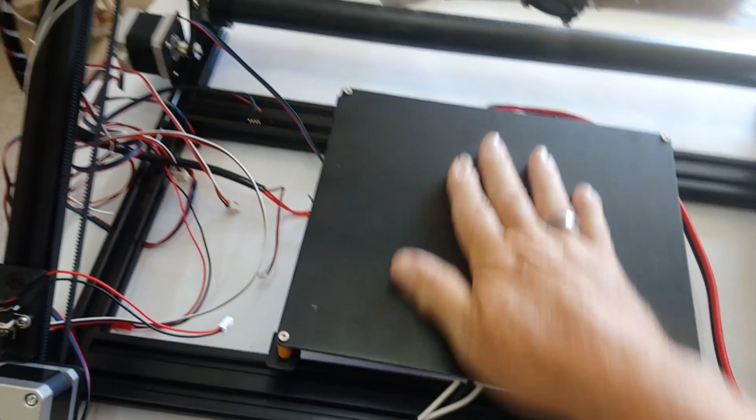I ordered it as an early bird. It took a long time to get here due to COVID and all sorts of other problems. Anyway, when I got it, I was really disappointed. The design is, I can't imagine anybody designing a printer like that. I'm sorry, no.

So this is the story of me trying to fix that. And I'm getting there. I'm not finished yet, but I'll show you what I've got so far.

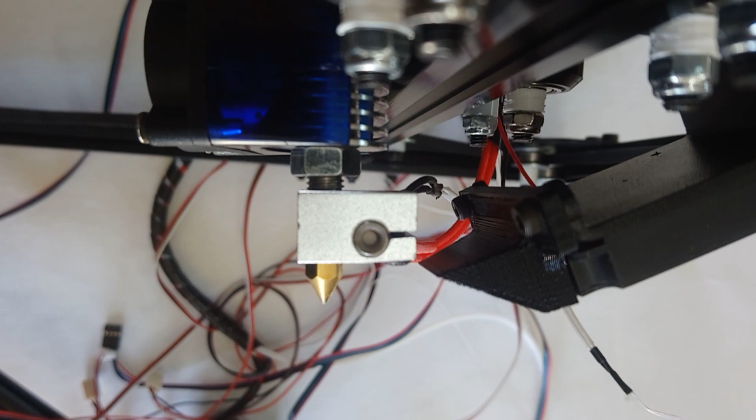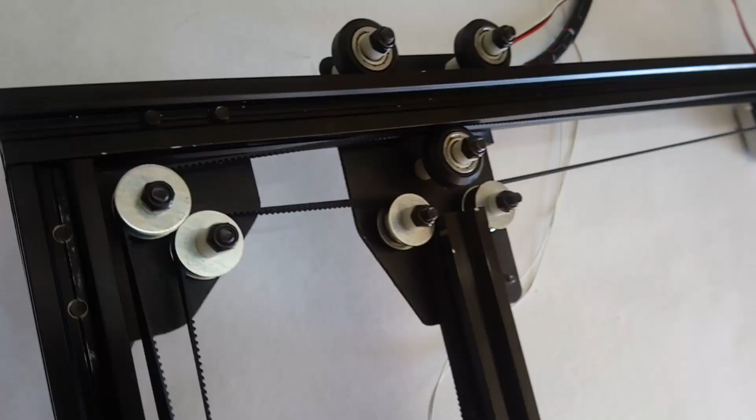There's supposed to be a belt across the heat bed here. Basically it's a CoreXY design, with the motion system using V-slot wheels in the ubiquitous V-slot, and these standard end stops and so forth.

But unfortunately I'm taking it apart again because the motion system, the CoreXY system, is completely flawed and badly designed. None of the belts are parallel. I don't know if you can see it here, and at the top you'll probably be able to see it better. None of the belts are parallel that need to be parallel.

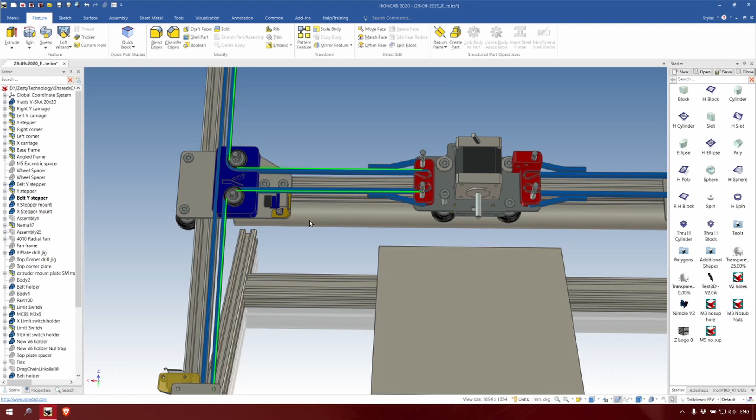There's no way to adjust the wheels, and there's no eccenter at all. And there's also no way of adjusting the tension of the belts.

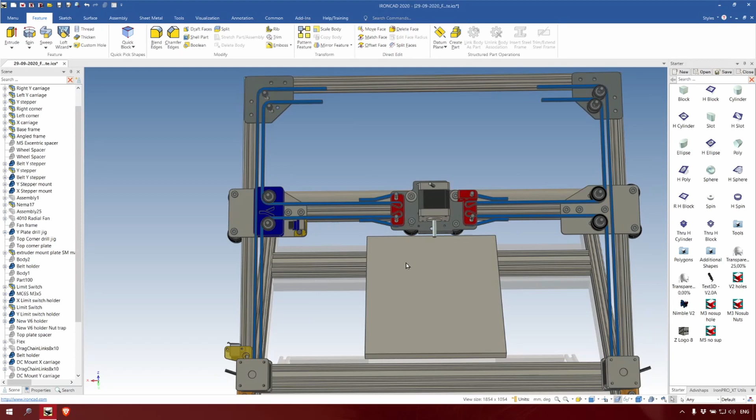So basically it's a V6, an E3D V6 clone with a Mark 8 nozzle, but of course the thread inside the nozzle isn't long enough, so the heat sink or heat break screws all the way into the heat block, meaning that little heat gap that there is, that very tiny narrow bit, doesn't work. And also it screws into the heat sink with only 2 or 3 threads, so there's hardly any heat transfer to the cooling fins. Okay, the nut does help a little bit, but not enough.

So I'm expecting a lot of leaks there, and I'm expecting a lot of jams because of heat creep.

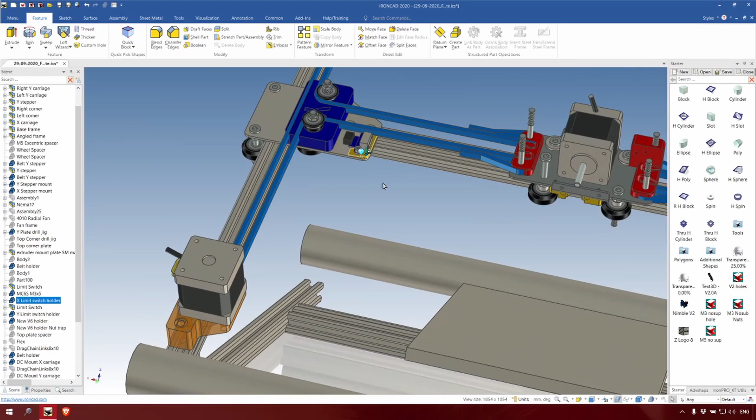Of the whole CoreXY design, the thing that bugs me the most is this little detail. There's a belt going inside the profile and it rubs against the V-slot wheel. I don't understand how you can design that. I really don't.

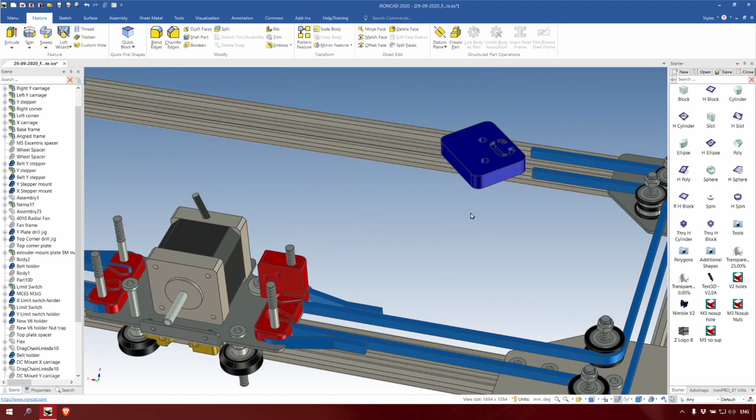So what am I doing about it? Well, first, I'm going to change the CoreXY system. Second, I'm going to add OpenBuilds standard wheels. All the wheels are standard, but with eccenters and spacers. Third, I'm going to try and change the hot end, make it actually work. And fourth, yeah, the belt—I haven't even talked about the belt yet, but that'll come a little bit later.

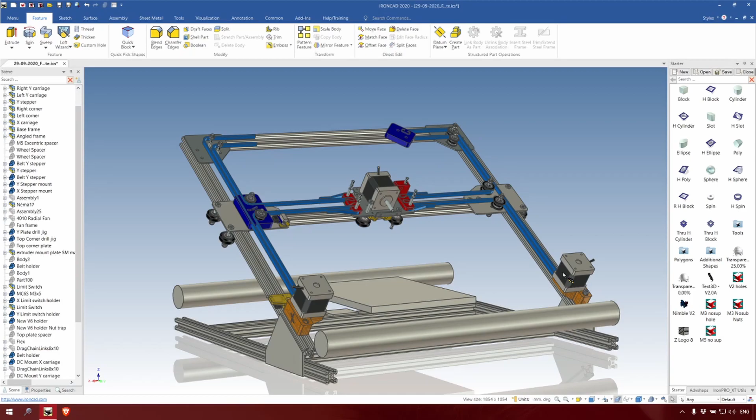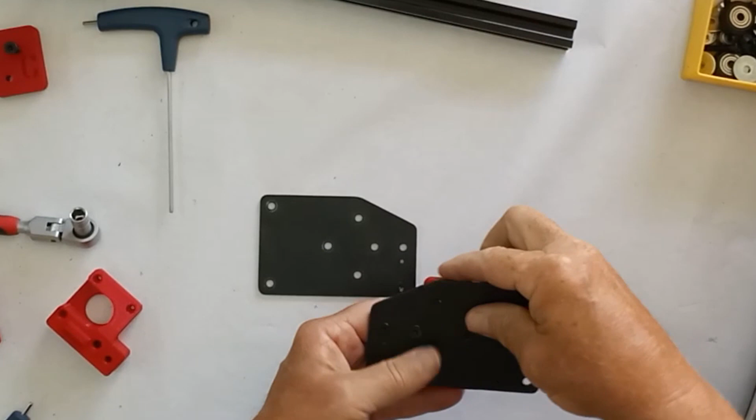This is the overall new design. I've placed the belts on top, which makes it easier to assemble, but also gives you the freedom to put the things correctly. For instance, these belts are now parallel, as are these. They weren't before.

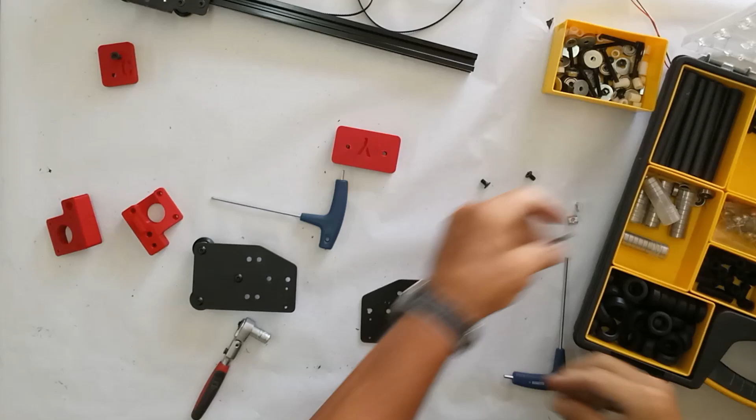This belt is going to be slightly angled. On the design it's straight, but the pulley isn't correct at the top. It's going to be slightly angled, but because the distance between the pulley and the stepper doesn't change, that doesn't matter. It's the moving parts that need to be parallel, and they are.

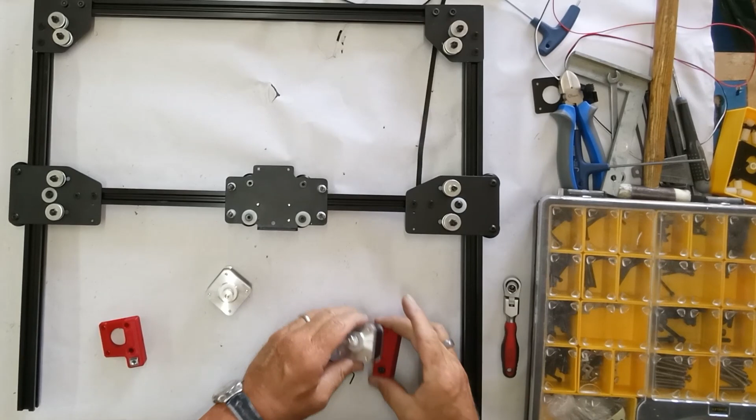I made new little clamps for the belts. I've made a mounting bracket for a belt chain, or drag chain if you want. And I also made a mount on the other side for the drag chain to be mounted onto, but I'm not going to use it because I already cut my cables too short to do it.

Okay, the other thing I needed to change was the V6 holder. I needed to put a little cutout for the wheel because these wheels have now come closer—or at least the plate has come down, so closer to the wheel. And I needed to design a new end stop holder for the X and for the Y.

And finally, I made new stepper mounts. I had to move the steppers up, but I also moved the bolt that holds it down so it's accessible, meaning you can loosen it, tighten the belts, and then tighten the bolt again. So all in all, this is a much cleaner design.

To make this happen, I've designed some drill jigs: a top corner drill jig and the Y plate drill jig. These drill jigs fit inside the existing holes and allow you to drill the new holes correctly. Same with this one, the corner drill jig.

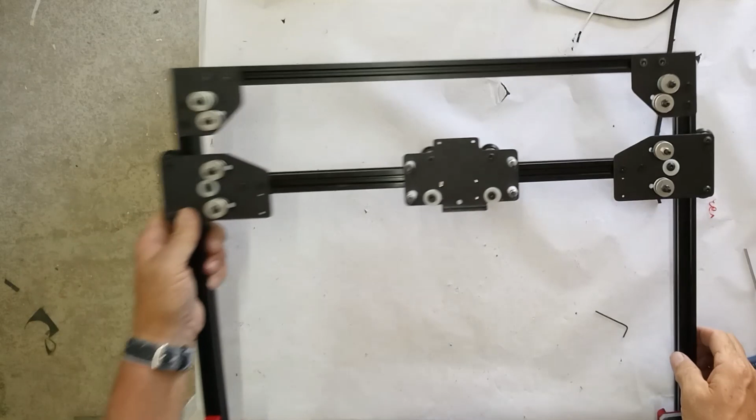You can use the same drill jig for both sides, because it's just a mirror image, so you just hold it upside down and mount it. So this is what I'm going to do. I'll just print it all out and start assembling and see if it works.

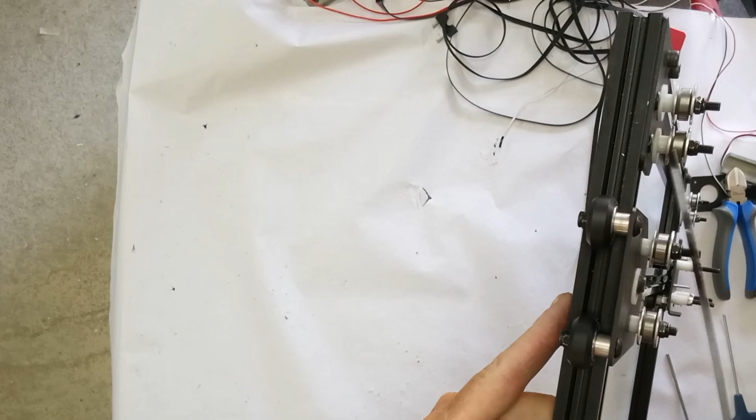I've made a little drilling jig for the corner posts. One hole stays the same, one hole is a completely new hole. We'll make the belt go parallel.

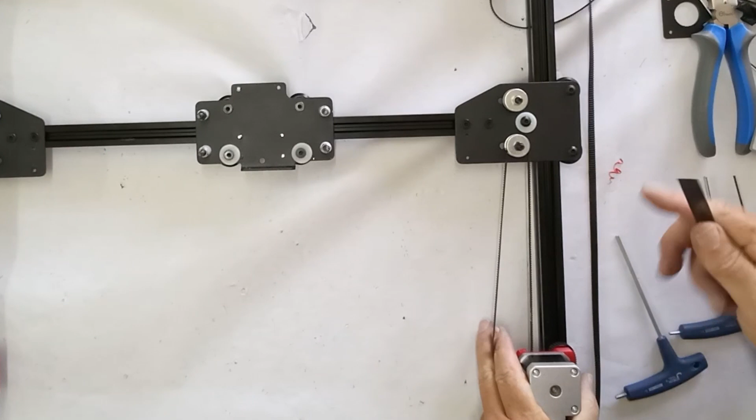Okay, so this is the Y drill jig for the Y plate. It fits in the two original holes and makes two holes on the other side. I don't need to make another one because this one will just fit on the bottom of this one, because I made the holes symmetrical.

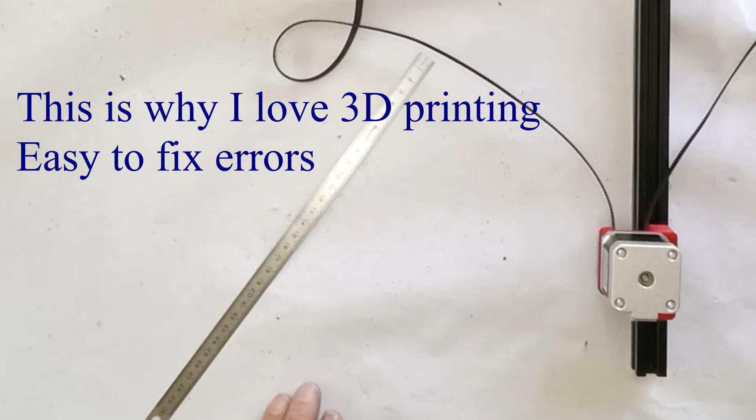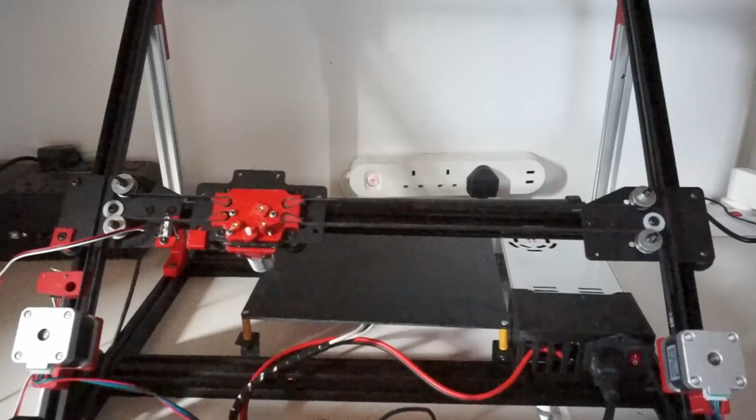On the X rails these wheels did have a little bit of adjustment because they were attached with V-slot nuts, so you could tighten them up a little bit, but that meant that if this was tight on the profile, this wheel didn't do anything, and might as well take it away. But it needs this kind of stability because you're going to get racking anyway with CoreXY, so it would be best to have this adjustable. So that's what we've done.

As you can see, we're making progress. Now the steppers. I'm going to mount them like this. Like this. And should I put the cable this way? This way. Let's do it this way.